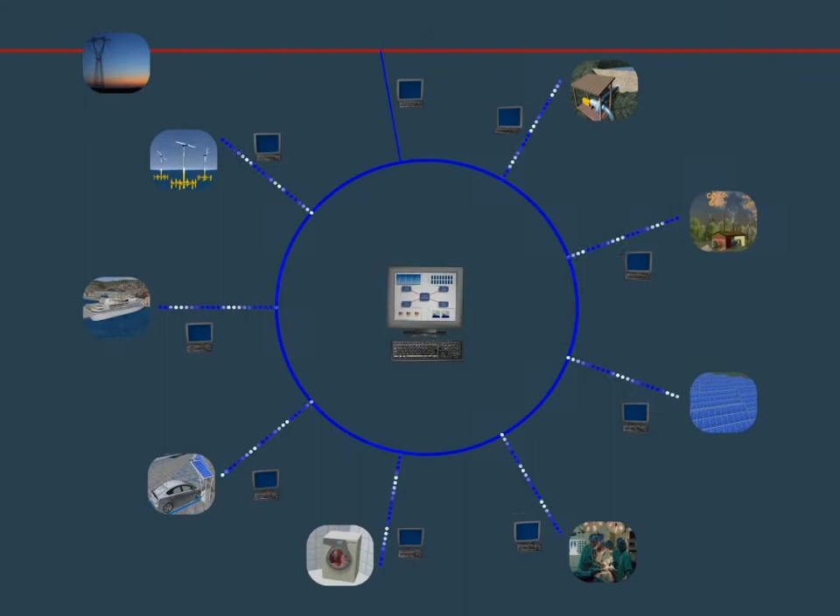Project ZEUS is based on 4 simple principles: reduced energy consumption through efficiency, incorporation of renewable energy sources wherever possible, implementation of electric urban transit, energy savings through changes in consumer behavior. To support this project, a sophisticated software platform for energy management is required.

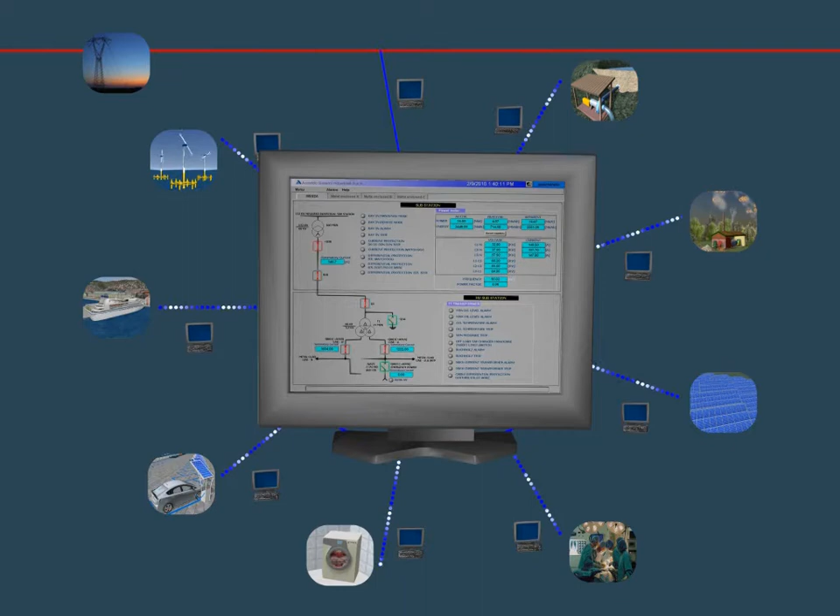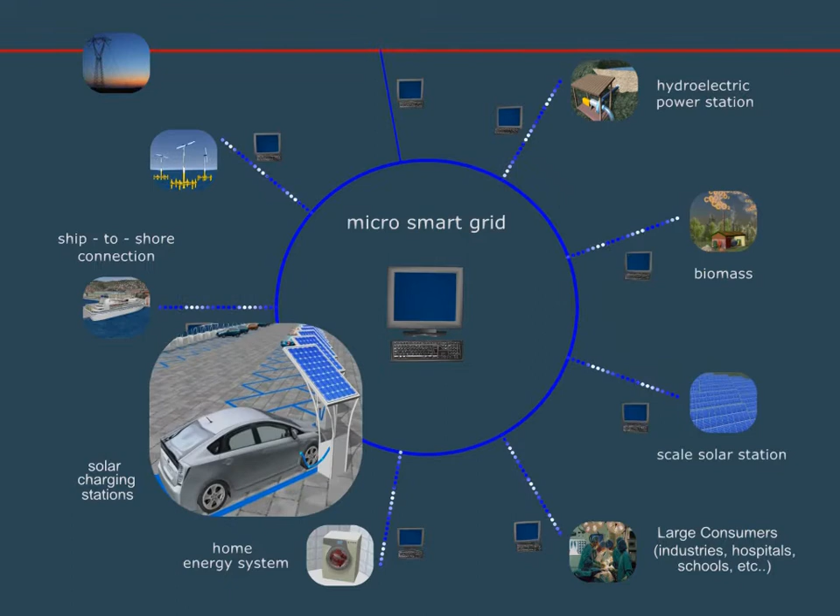The power management system monitors energy consumption, providing users with indications for optimal energy use. It also manages renewable power sources like wind, solar and hydro to help guarantee a stable energy flow in the network. At the heart of the technology is the concept of the micro-smart grid, a subset of the energy network that is managed at the local level, feeding into the larger national or international energy grid on an as-needed basis.

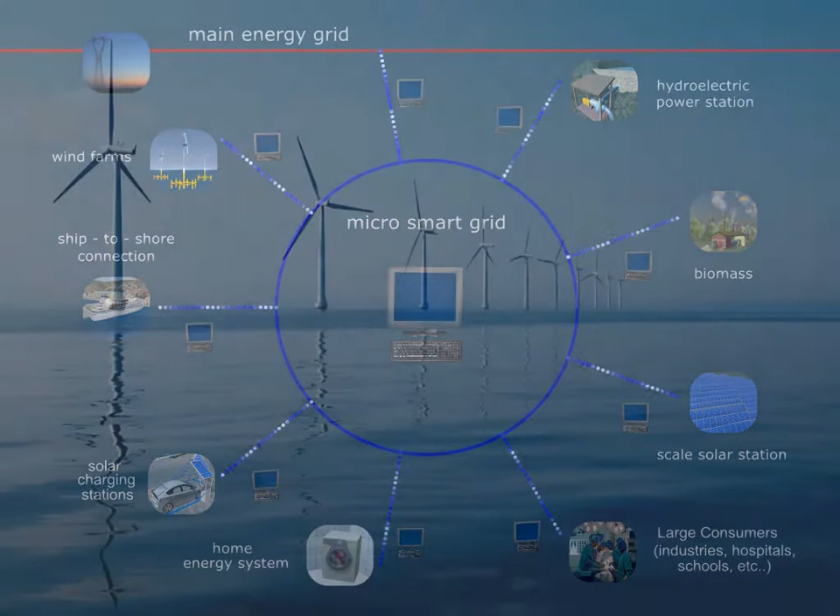But why the need for an intelligent system? Let's take a closer look at energy supplied from renewable sources like wind, solar and hydro. Today, these sources are being tapped into at an increasing rate. Already widely used onshore, technology is emerging which will allow us to place wind farms offshore to capture the stronger, steadier winds that blow there.

Solar panels are also being integrated into local energy networks. Desolate corners of land, no longer in use for other purposes, are being transformed into commercial-scale solar stations. Sources of renewable energy don't stop with wind and sun. Biomass and hydroelectric power stations are also coming into vogue. Solar panels are also becoming a staple sight on an ever-increasing number of rooftops.

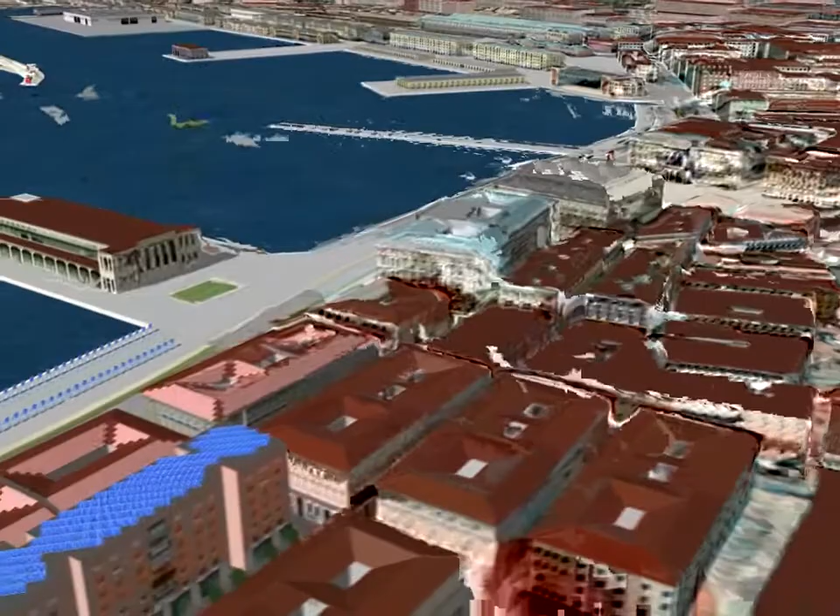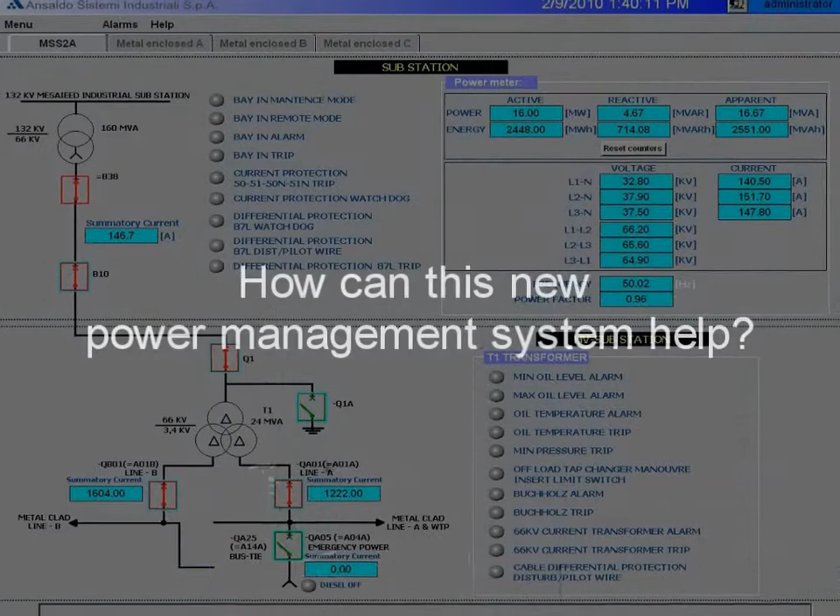But what are the disadvantages, if any, to these technologies? How can this new power management system help? How does the answer to these questions fit into Project ZEUS? Over the next few minutes, we will illustrate several scenarios to highlight the challenges and importance of the new power management system and Project ZEUS.

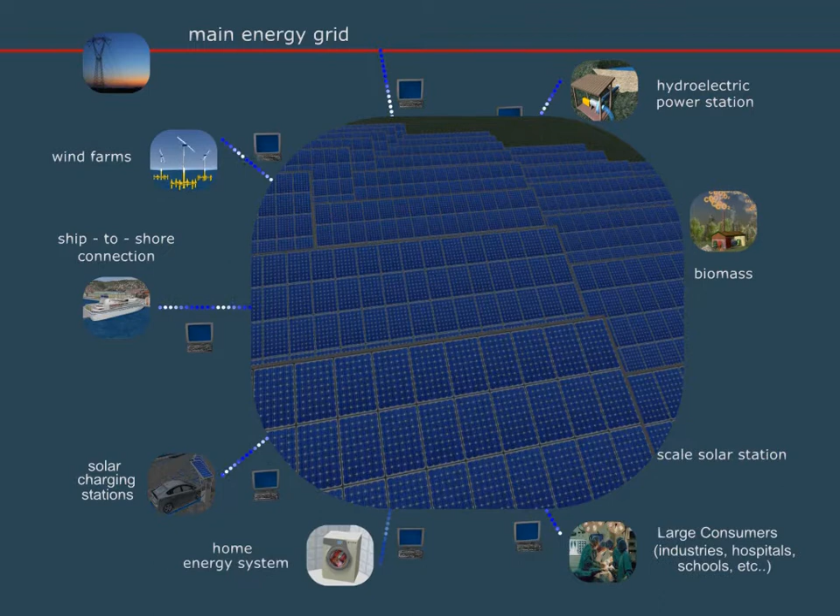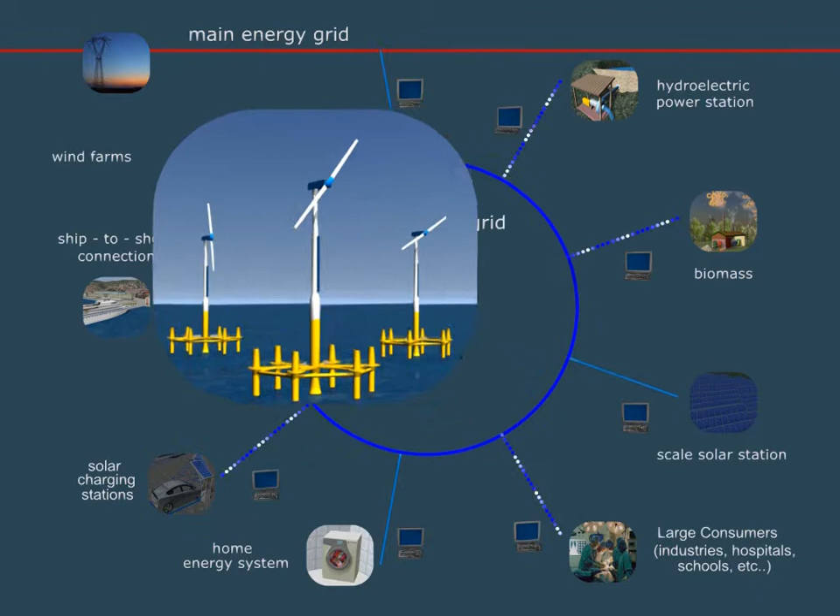One of the most critical aspects of renewable energy sources like solar energy is that they are often unpredictable and rarely constant. A storm that rolls in and blocks the sun causes a drop in energy production. Wind can suddenly die down, leaving the wind generator at a standstill for days before a new wind comes through. Even hydroelectric power stations are subject to changes in energy production based on water flow. In times of drought, there may be little water flowing through the bed.

Energy produced from renewable sources is shown in blue. The main grid is shown in red. If the smart grid also receives energy from the main grid, its color turns to purple. What is needed is a combination of renewable sources with a stable traditional energy source to guarantee constant energy supply.

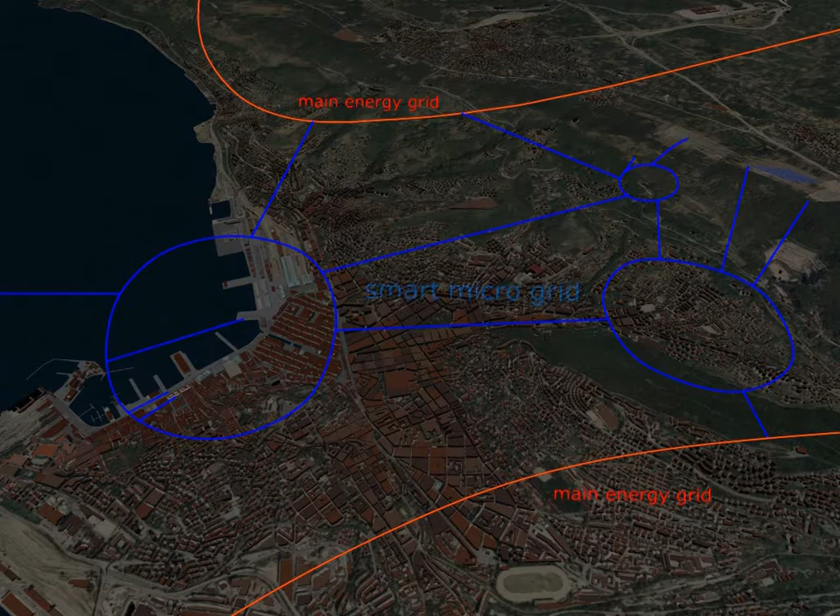The smart microgrid is based on this concept. The microgrid is a set of energy suppliers and energy users that are connected together in an optimum configuration that balances the energy supplied with energy demand. Differences in supply or demand are handled through the connections to the main network or national grid.

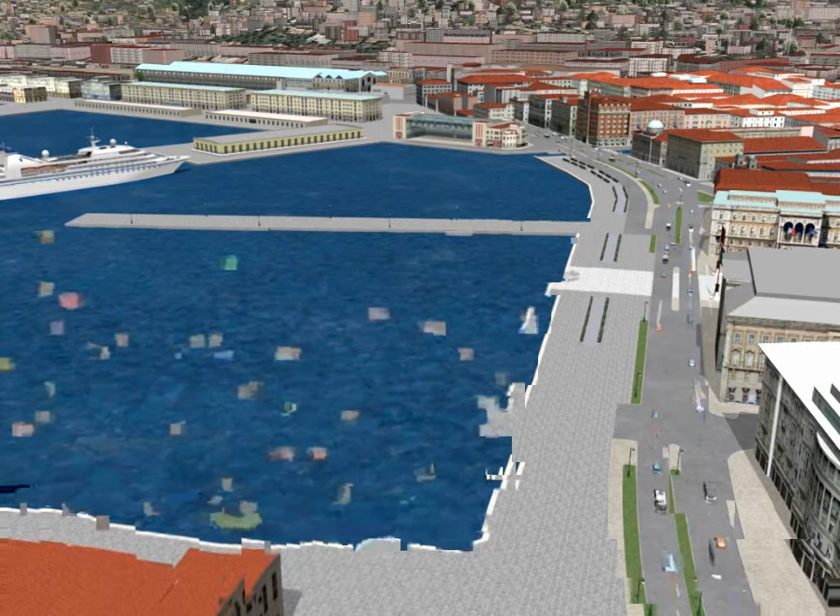How does the grid function? Let's look at a few examples. To reduce pollution in our harbours, many cities are asking port authorities to install ship-to-shore connections so that the ships coming into the harbour can use electricity generated onshore to supply their on-board needs. This avoids using the ship's diesel generators while the ship is in the harbour, significantly reducing CO2 emissions.

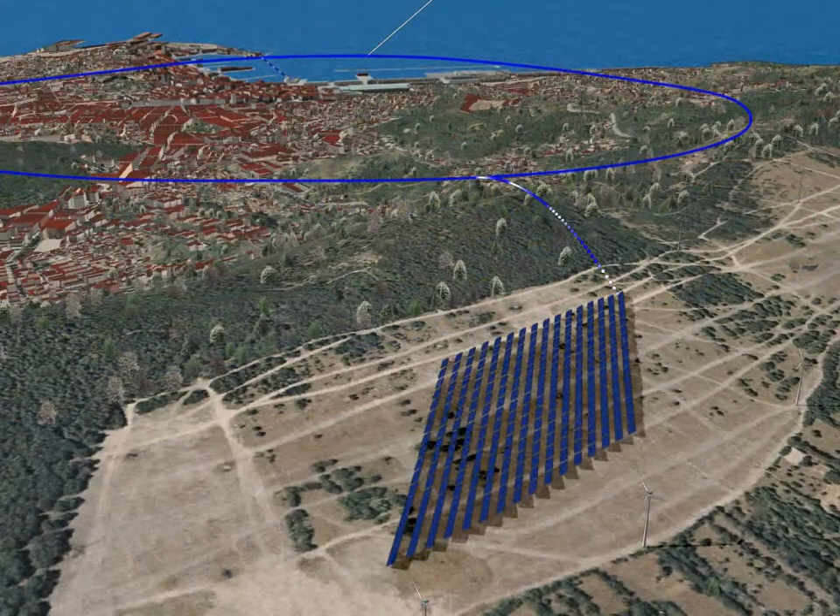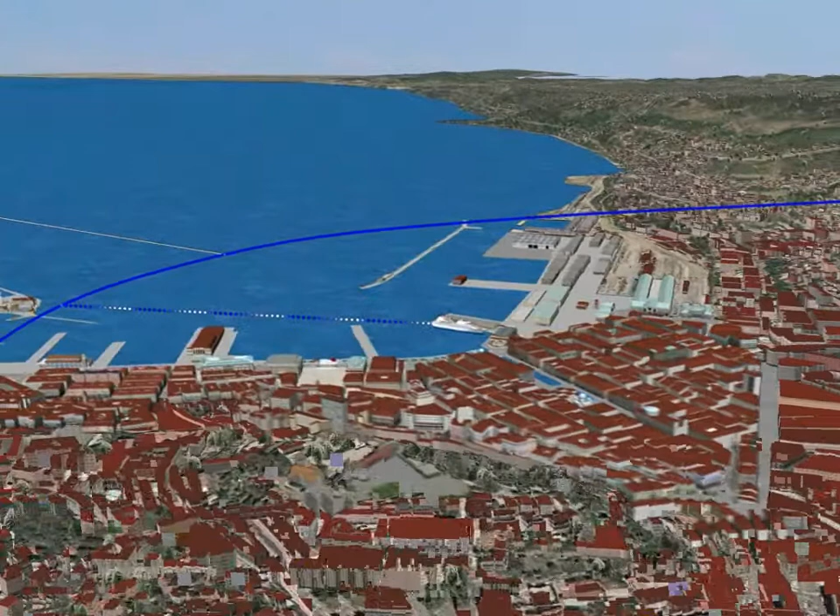But the energy has to come from somewhere. The local microgrid will be designed with these needs in mind. Energy will be supplied from renewable sources whenever available. Should there be a sudden change in energy supply from a renewable source, for example a brewing storm, the energy management system would open the line to the main grid, drawing energy to compensate for the drop in renewable energy being produced.

As the storm picks up, so does the wind. The wind generators are therefore able to feed energy into the grid. The system reverts back to a closed or island mode using the renewable energy produced by the wind generator. Should the wind generator produce more energy than necessary, this excess energy will be fed into the main grid, making it available for other users at another point in the network.

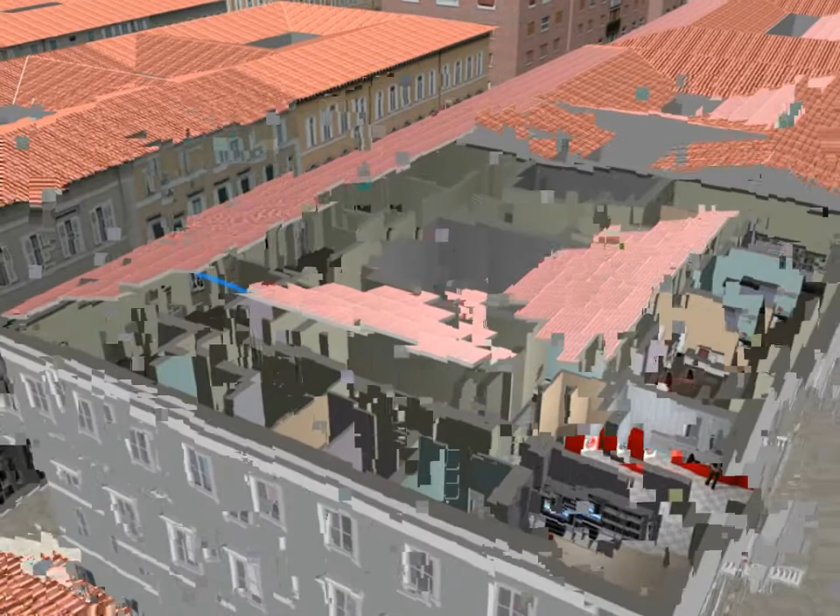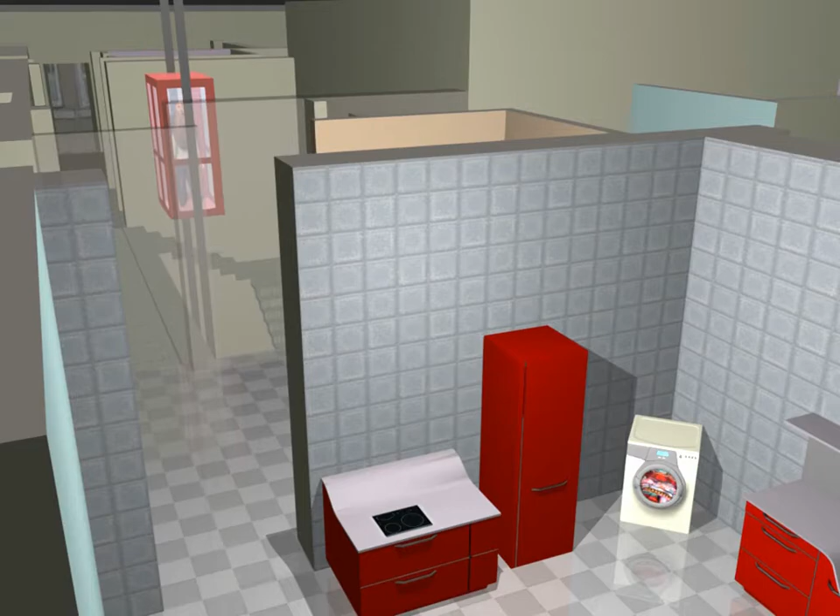Would a situation like this have an impact on our private lives at home? In the future, homes and buildings will be connected to the smart grid through home energy systems, often called domotics. Using the previous example, let's have a look at how this would work. As you can see, energy is being used throughout the building. The elevators are running regularly. The washing machine is on. The microgrid is producing at optimum level. The ship comes in. Now more energy is required.

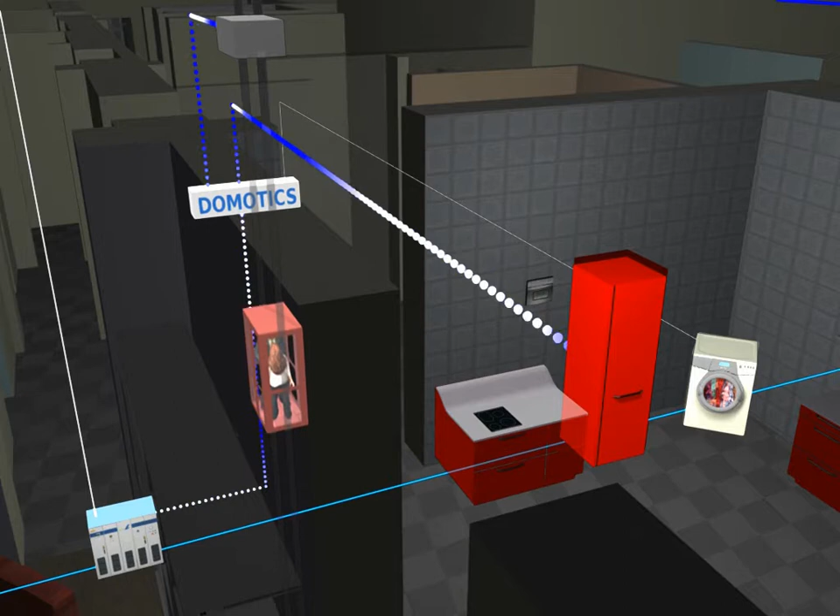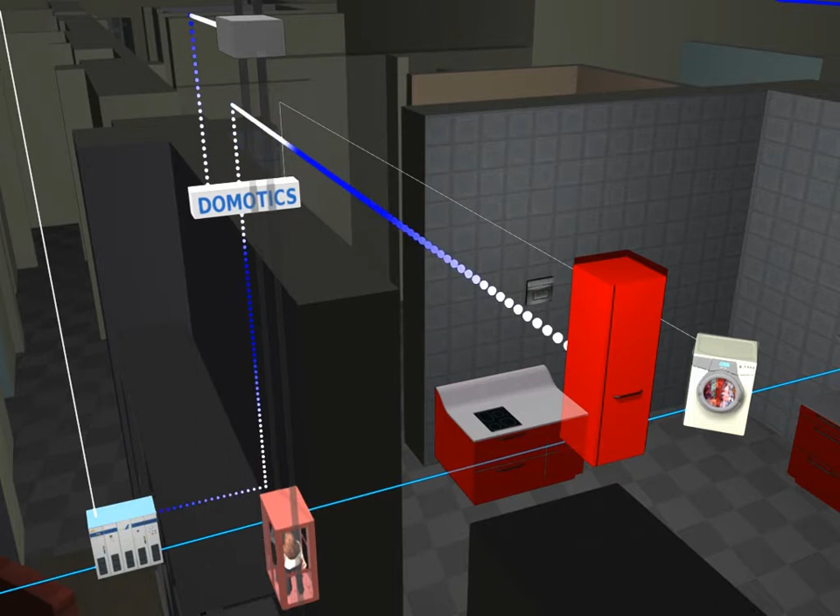According to the rules that the user has established for his home energy system, the washing machine will either remain in standby until additional renewable energy is again made available, or the system will buy energy from the main grid. The mechanisms for buying energy from the main grid have yet to be defined. The elevator, on the other hand, along with the refrigerator and other critical appliances, continue to receive energy.

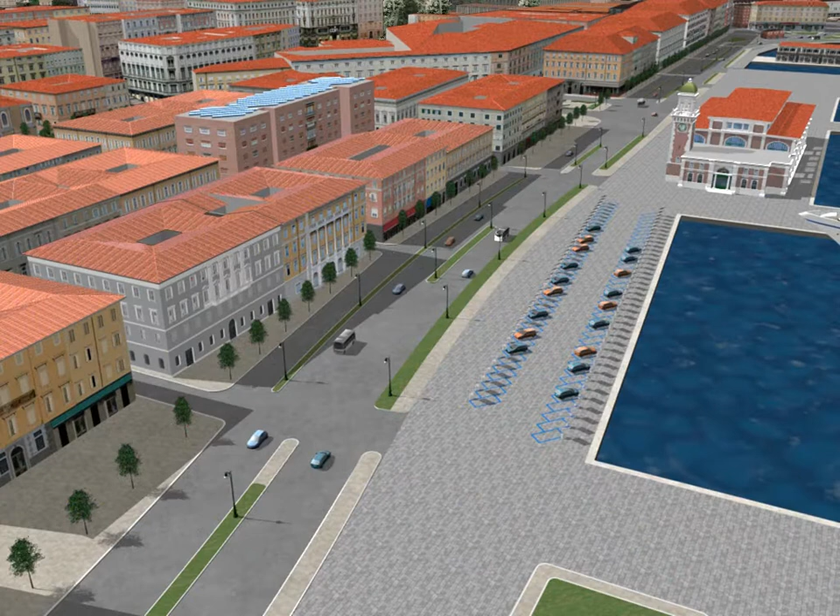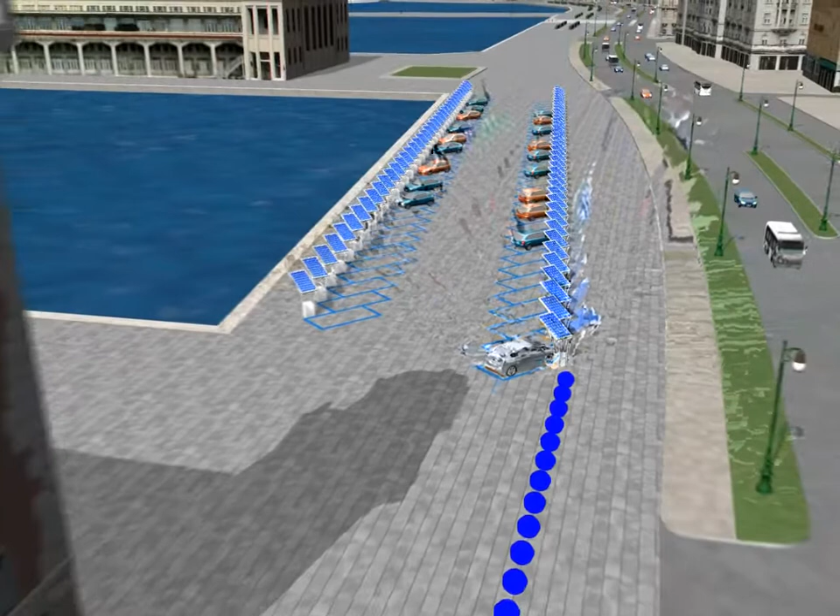Electric vehicles are a key component in future microgrids. Many experts see these vehicles as a way to store excess energy. Let's look at how that might work. During the day, the solar panels charge the cars parked in the charging area. Generally speaking, the solar energy should be sufficient. If the solar energy is not sufficient, the system will call for energy from the grid.

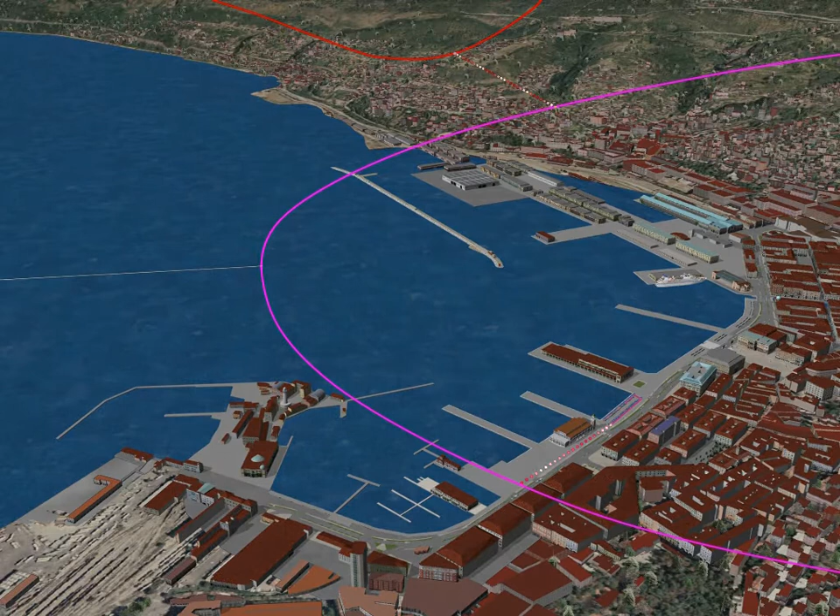But what happens at night? That gentle breeze coming in from the shore means that our wind generators are working. Since it is night time, energy demand is low. The energy produced by the wind generator can be stored in the car batteries. The owners will find the cars ready to run in the morning. Should the wind farm produce more energy than needed, it's not a problem. Excess energy produced will be fed to the main grid.

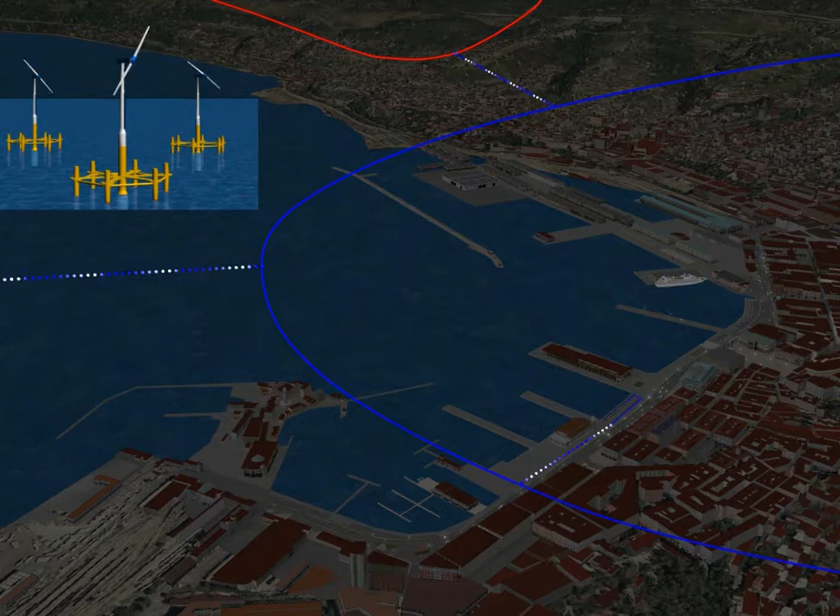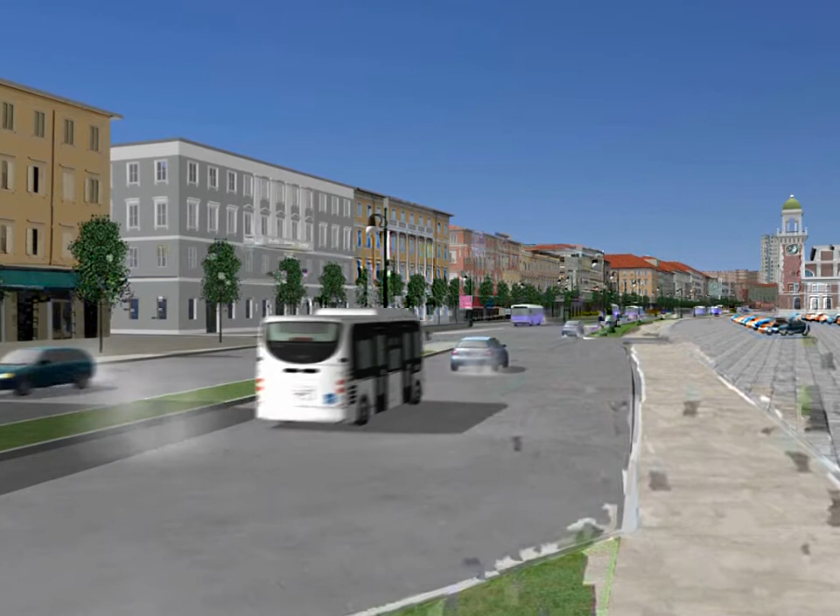The new platform is an intelligent software system that makes real-time decisions concerning energy flow to guarantee that energy consumption within the microgrid system is always optimized, helping to ensure that energy is always available when needed. The new power management system will make an important contribution to improving energy consumption and incorporating renewable energy sources into the energy network, but it won't solve all of our CO2 problems.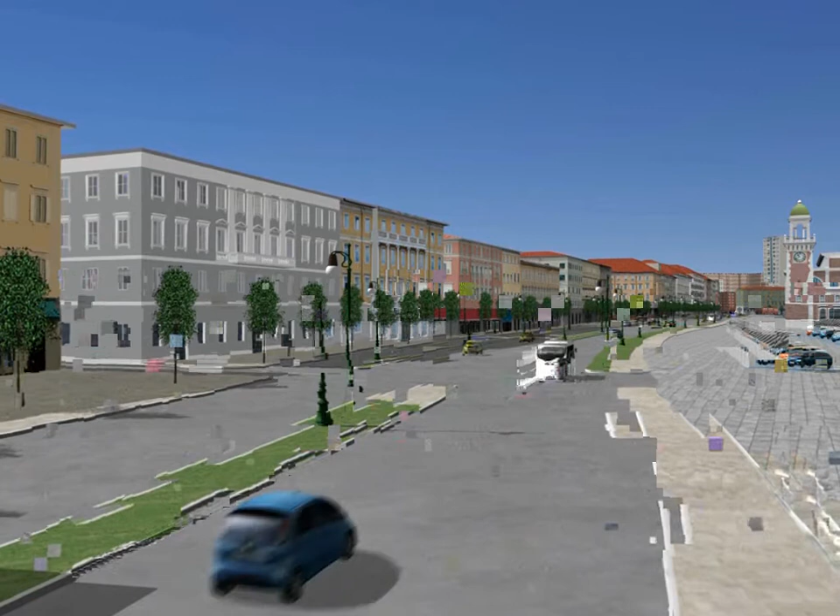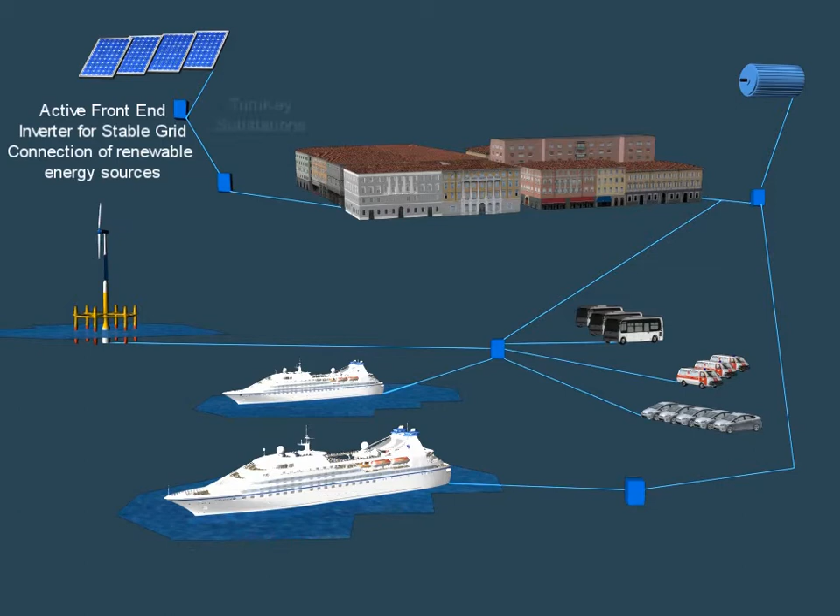Government officials will have to do their part to promote electric urban transit and, more importantly, greater consumer awareness. Electricity is not an infinite resource. We all need to learn to use it more wisely. That's why Project ZEUS, Zero Emissions Urban Solutions, is being actively promoted. To ensure concrete results, the following 4 steps are needed.

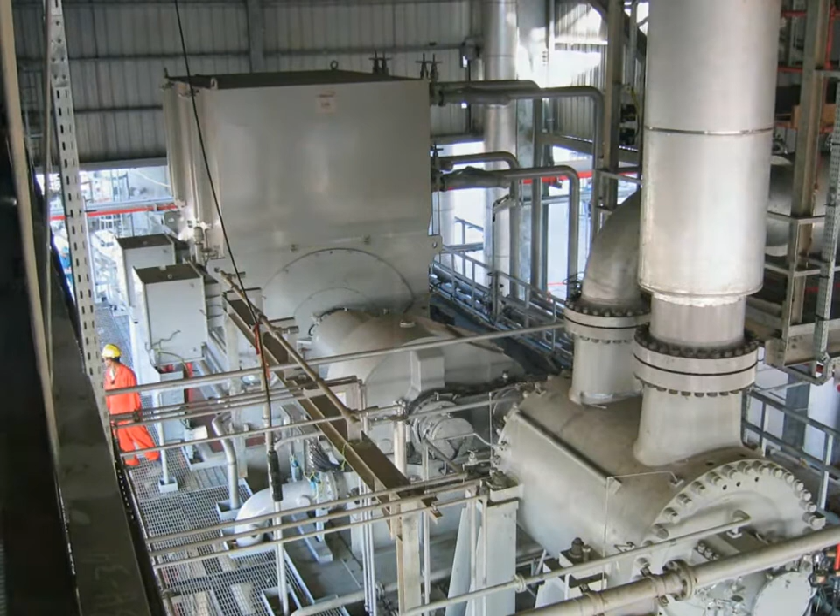Reduce energy consumption through improved efficiency. For example, the use of variable speed drives on electric motors for pumps, fans and compressors can significantly decrease the amount of energy being consumed and prolong equipment life. Incorporate renewable energy sources. By relying on the wind, sun and water wherever they are available, we can reduce the need for fossil fuel energy production. This will make a significant contribution to the CO2 reduction.

Electric urban transit. By using electric buses and cars, we can significantly reduce CO2 emissions in our cities and towns, improving the quality of life for everyone. But most important of all, we need to learn to save energy. By using less energy, we all do our part to protect the environment. This is an individual commitment that each and every one of us has to make if we want to achieve significant changes for the future.